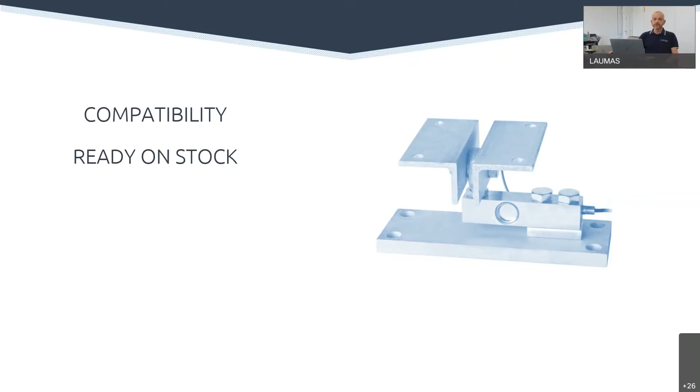The second strength that we have to keep in consideration is the stock. We have about 50 standard load cell models in our catalogs, and all of them, except the very special ones, are available in stock. Just to give you an idea, we have about 40,000 load cells in stock ready for delivery. And in general, our average lead times are 2-3 days from the ordering date.

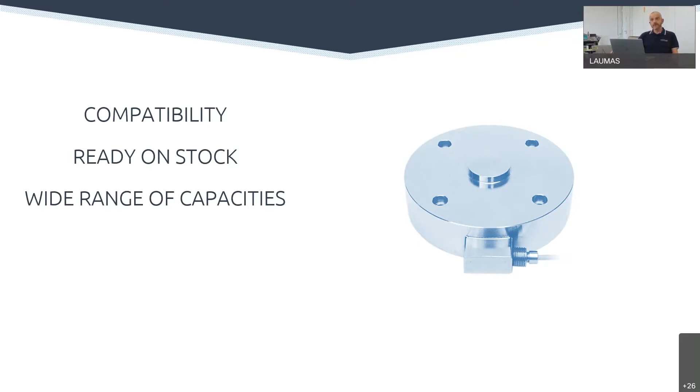Supporting the stock, we have a wide range of capacities. With our standard load cells, we cover a range of capacities going from a few grams up to 750 tons. And for every single model, we have several capacities available in order to offer you a suitable solution for any application in force and weight measurement.

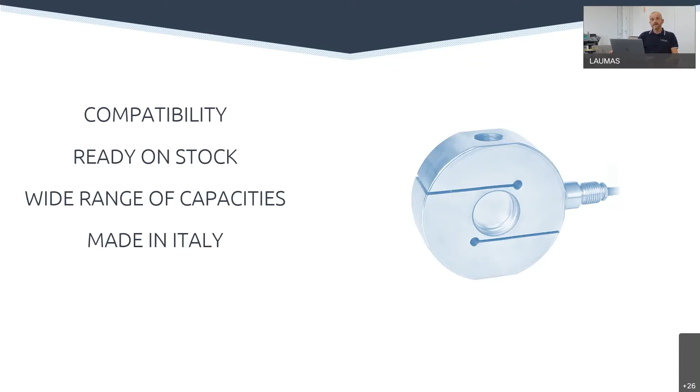The fourth strength is that we have many load cells made in Italy. Like any other producer worldwide, we make cost-effective load cells, for example single points and shear beams, in China for a matter of production costs. But 40% of our load cells, and especially the high-quality ones, are still made in Italy, and we are really proud of it.

The last strength that we keep in mind is that we make customized load cells. As I told you, we have our own factory in Italy, and so we can produce customized load cells made according to the customer's requirements. We can make them with any shape, any capacity, up to 2,000 tons. We can make them for high and low temperatures, with double bridges, with integrated analog output, and so on. This is a niche market, but it's certainly an added value and one of our strengths, because not many producers worldwide are interested in making customized load cells.

So, how to choose the right load cell according to your application? When we approach a new application, we base our choice on two main factors, which are the environment and the type of weighing. Knowing the environment is absolutely necessary for us to start understanding which kind of load cell could be suitable. If, for example, we are talking about the food or chemical industry, we will certainly need stainless steel load cells, and we will exclude alloy steel.

At the same time, if we have to make a scale for a warehouse, stainless steel will probably not be mandatory, and we could think about alloy steel load cells with galvanized mounting kits to reduce the costs. If it is, for example, an installation in the flour industry or in oil and gas, we will probably need load cells certified for explosion-proof areas, and so on. So, one of the first things that we have to keep in consideration and that we need to know is the environment.

Once that we know the environment, we need to know the type of weighing system that we have to realize. Is it a truck scale? Is it a conveyor belt? A dosing system? Do we have to weigh, I don't know, a big silo or a small hopper? Is it a mixer with vibrations or a static weighing, as for example a platform scale?

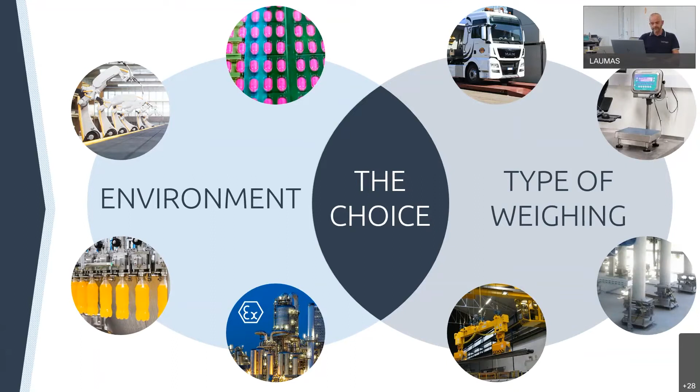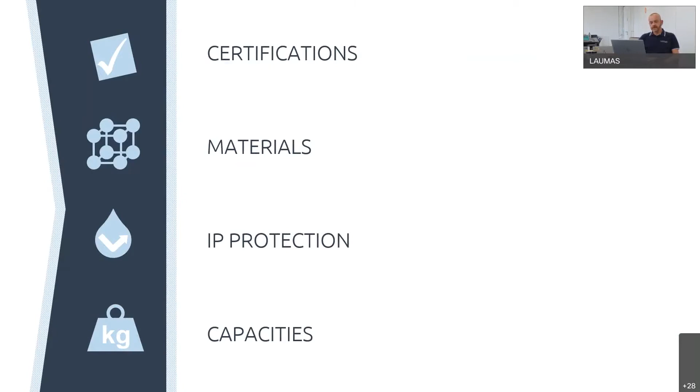Doing the operation of filtering that I described to you before, there are many things that we have to keep in consideration, and we can certainly start from the certifications. So, the system that you have to realize has to be legal for trade or not? I say that because very often people ask for load cells OIML R60 approved in class C3, C4, C5, and so on. But the question is, do you really need to realize a weighing system legal for trade or not? Or is it just for internal use?

When we talk about truck scales or retail scales, for example, the main part of them has to be legal for trade. So the load cells have to be OIML approved. And the higher the accuracy class, the higher will be the resolution of the scale that you'll be able to obtain. On the contrary, when we talk about the industrial sector, almost 90% of the weighing systems are for internal use. So the OIML approval for these systems is almost, I would say, useless.

Very often, people contact us to realize industrial scales or industrial weighing systems, asking for load cells approved C4, C5, and so on, because they want to be more accurate. But this is not necessary, and it's mainly a waste of time and money, because when you realize a weighing system for internal use, there are no restrictions about the number of divisions and about the maximum capacity of the scale.

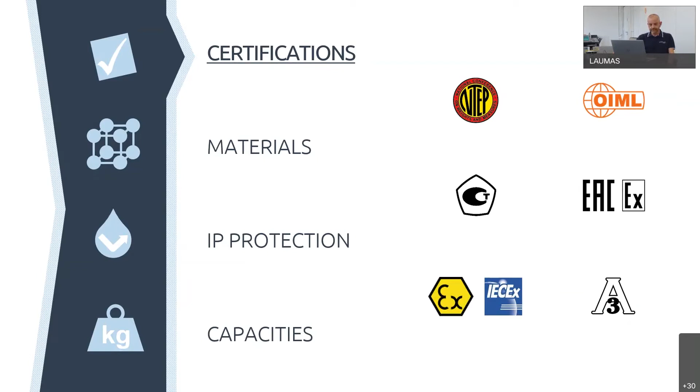As we have seen before, depending on the environment and on the weighing system that we have to realize, we have to think about the constructive material of the load cells. We have load cells made in aluminum, we have them in stainless steel 17-4 PH for very aggressive environments. We have them in stainless steel AISI 420 when stainless steel is required but the environment is not that bad. And we also have alloy steel load cells for common use.

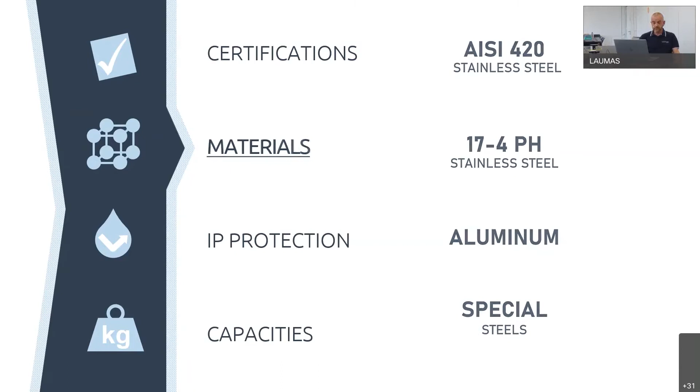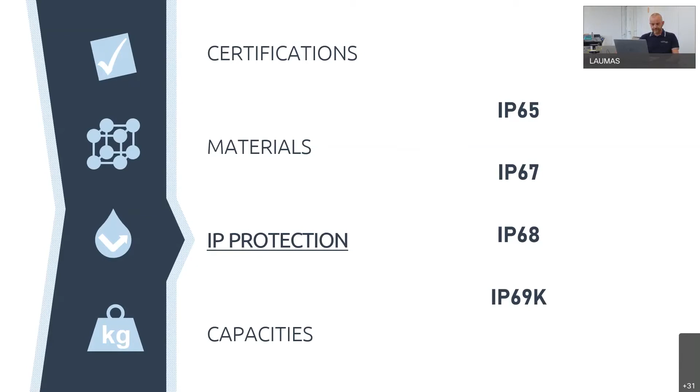Still connected to the environment, we have to keep in consideration the IP protection class. So we have load cells with IP class going from IP65 up to IP68 and IP69K. I always use the example of the pharma and food industry, and these are environments where you need to clean the scales almost daily with water with pressure and similar. So for such applications, you will probably need load cells with IP68 or IP69 certification.

Last but not least, we have to talk about the capacities. That is another important factor to identify the right load cells for your applications. So we produce load cells from 250 grams up to 2,000 tons. And it means that we have a solution for any kind of scale, from the smallest to the biggest ones.

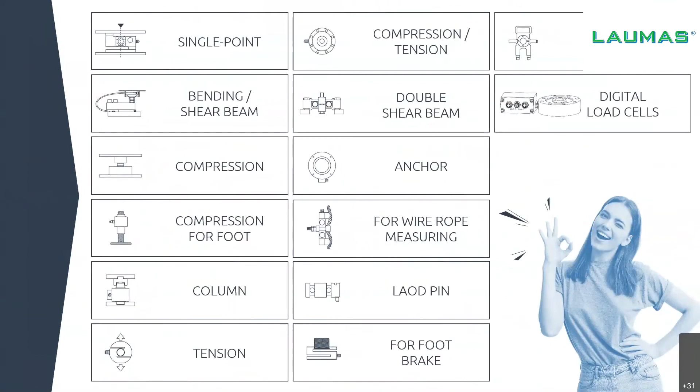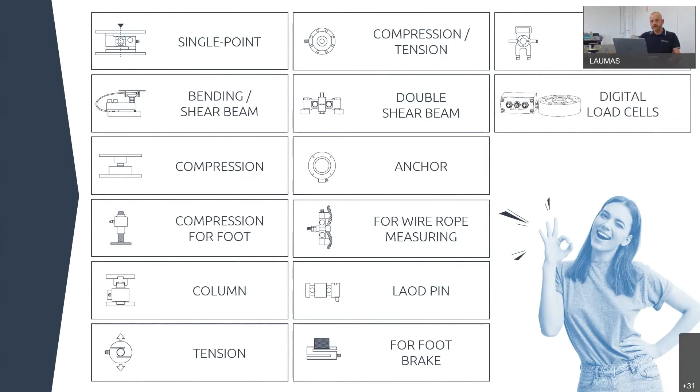And now we can start checking our load cell range divided per family. As we can see in this slide, we realize almost any kind of load cell. So we have single points, shear beams, bending beams, tension and compression, load pins, and so on. So the variety is really huge.

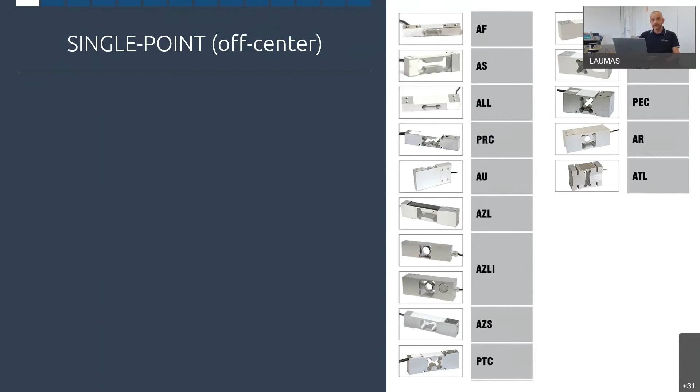Usually single points are low capacity load cells, and the smallest in our range is 250 grams, while the biggest one is for 2 tons. In general, the higher the capacity, the bigger the load cell, and the off-center too. There is always a proportion between the maximum capacity and the off-center load. So, in general, if a load cell has a small capacity, it has a small off-center too, and vice versa.

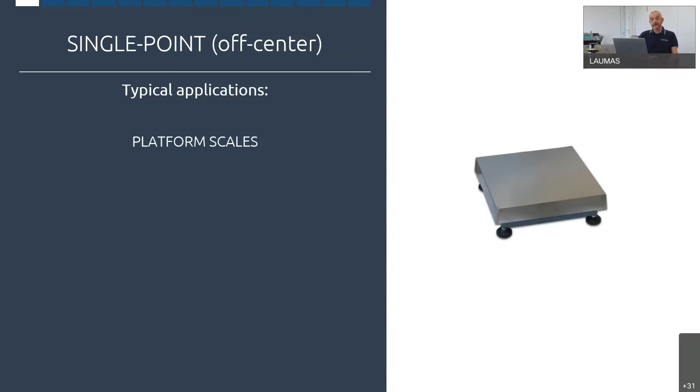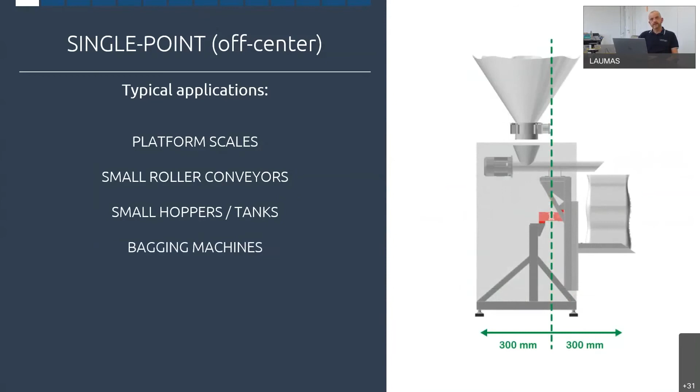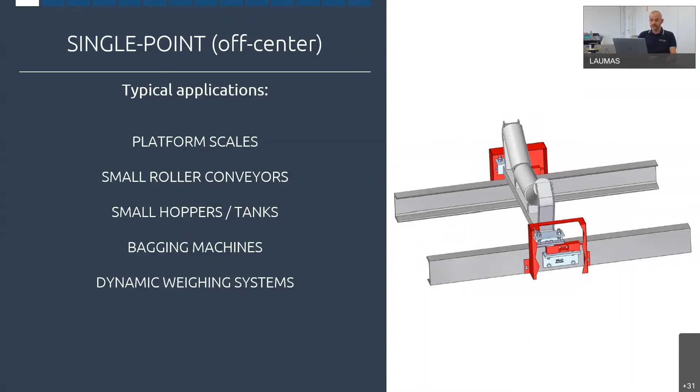Now we can start checking some typical applications realized with single points. The most common ones are certainly platform scales and retail scales. But you can also use them to weigh small roller conveyors, small hoppers and tanks, and filling and packing machines. Other applications where we generally install single-point load cells, but in pairs, are weighing bridges for conveyors for dynamic weighing applications, and machines for web tensioning. There are many more applications for the single points and for all the load cells that we will see later, but we just selected the most typical ones that we realize almost daily.

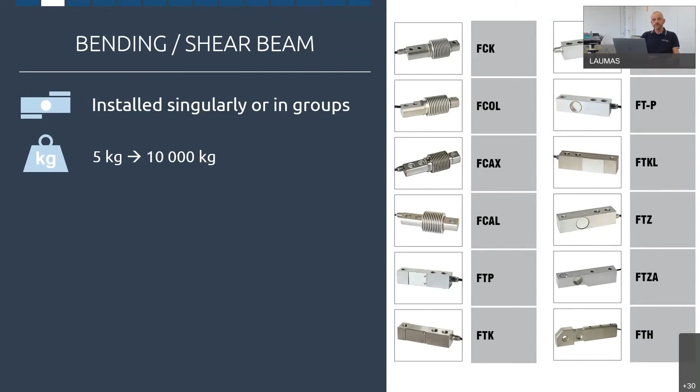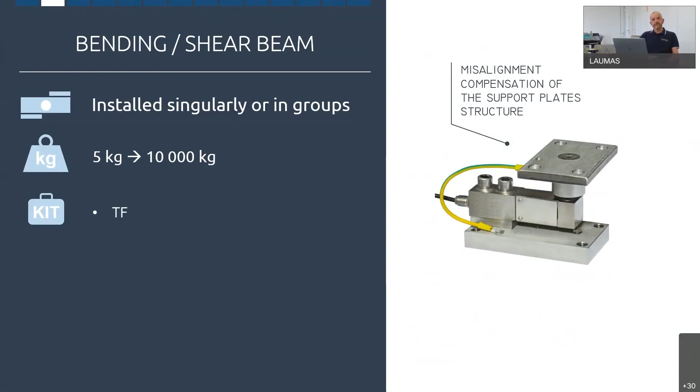To be installed with our load cells, we have 3 main families of mounting kits: the family TF, PV, and PS. Each of these mounts is available completely in stainless steel or in galvanized steel, and has specific features to comply with specific applications. So, for example, the TF series is suitable to weigh static hoppers. The PV is perfect to weigh conveyors, while the PS series is the better one when you need to weigh, for example, mixers with high vibrations.

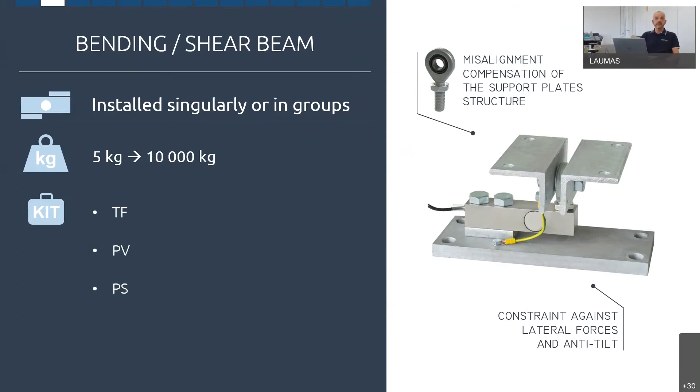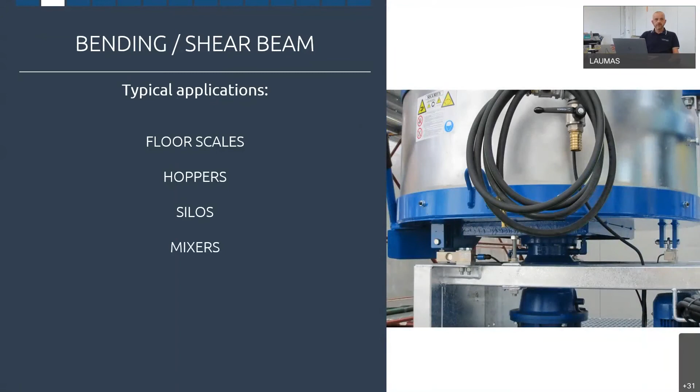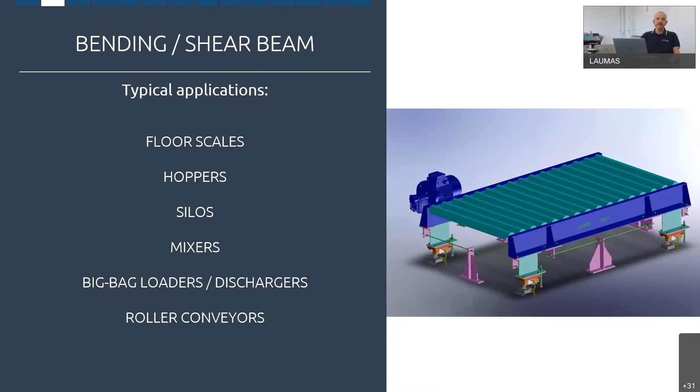And now we can check some typical applications realized with bending and shear beam load cells. So we have, for example, floor scales, hoppers, silos of medium-small capacity. We can also use them to weigh mixers or big bag fillers or dischargers, and also roller conveyors. Again, these are just examples of applications. There are many others, but I would say that these are the most popular ones.

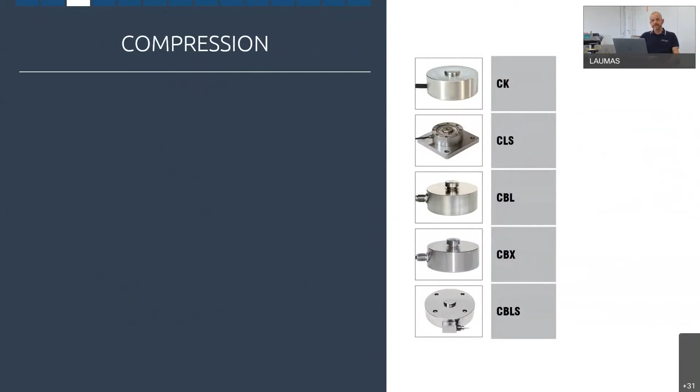Now we can switch to another important family that is composed of the low-profile compression load cells. As with the beams that we have seen, the compression load cells are generally used in groups of 3 or 4, or even more connected in parallel, but you can also use them singularly. So these are just indications. The range of capacities goes from 200 kilograms up to 750 tons. But from time to time, we also realize bigger ones, up to 2,000 tons.

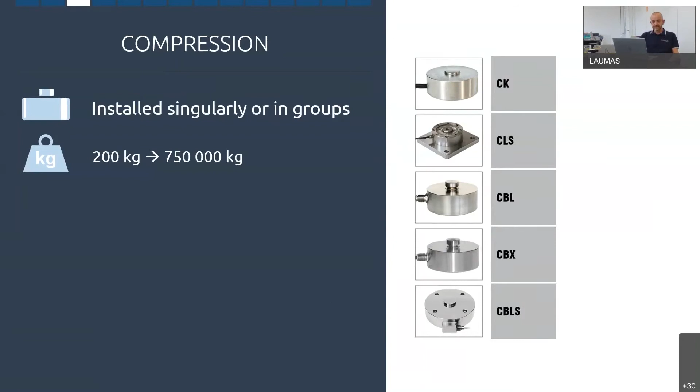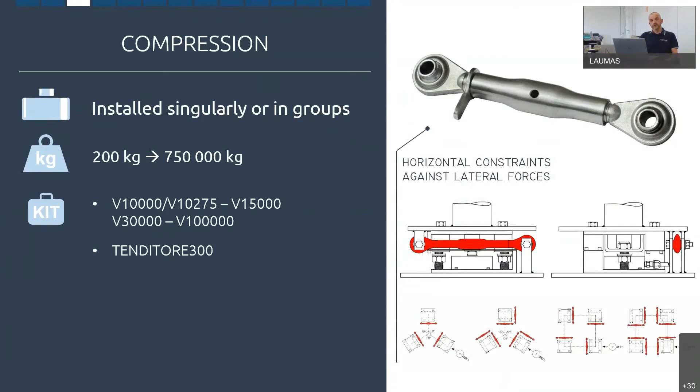These load cells, depending on the models, can be coupled with several mounting kits. So, for example, for the CBL series, which is our most popular, we can offer the V-series mounting kit. It's a complete mounting kit, user-friendly and including an anti-tilt system and constraints against lateral forces. This family of mounting kits is suitable to weigh structures from a few hundred kilograms up to hundreds of tons, and is generally used to weigh silos and tanks. As an alternative to the complete mounting kit, we can also offer stay rods and bases to help you in building mounting kits on your own according to your specific needs.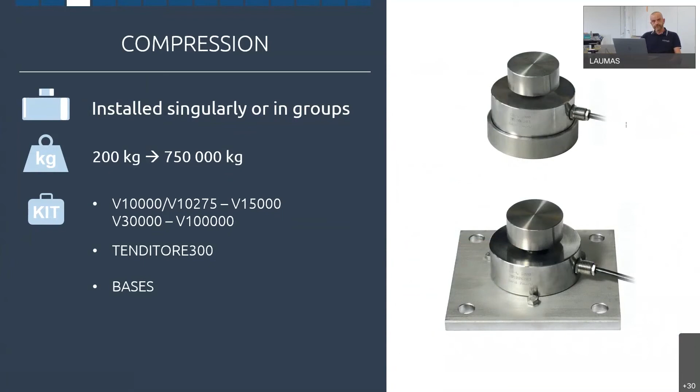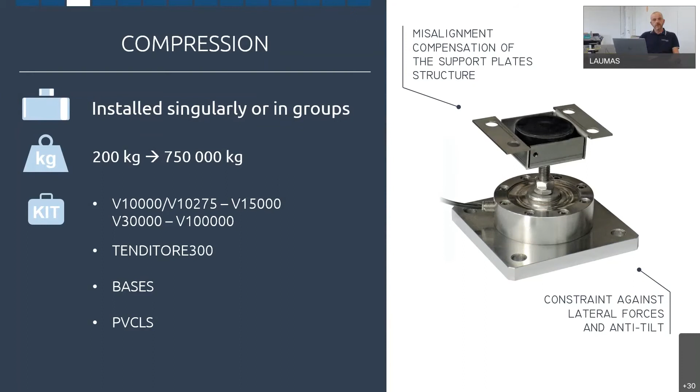We also have some specific models of mounting kits especially made for CLS load cells and realized with the same concept that we used to realize the mounting kit series PV and PS that we have seen for the shear beam load cells. So we have the PV CLS and the PS CLS. Same concept, same reasoning for the selection.

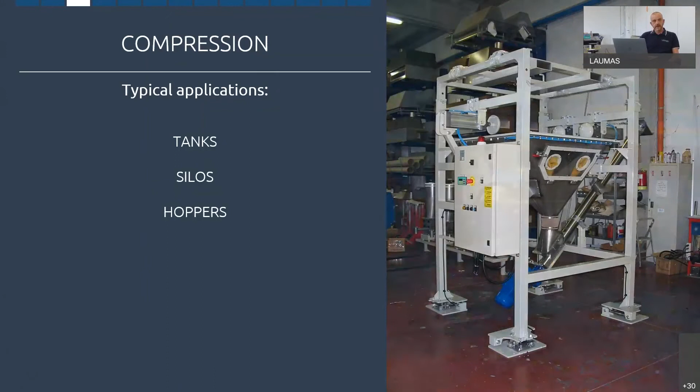And here again, we are back to the typical applications. As I told you, certainly tanks and silos, especially of medium-high capacity, are the most popular applications for which we suggest installing this kind of load cell. But you can also use them to weigh hoppers, mixers, and again, big bag loaders.

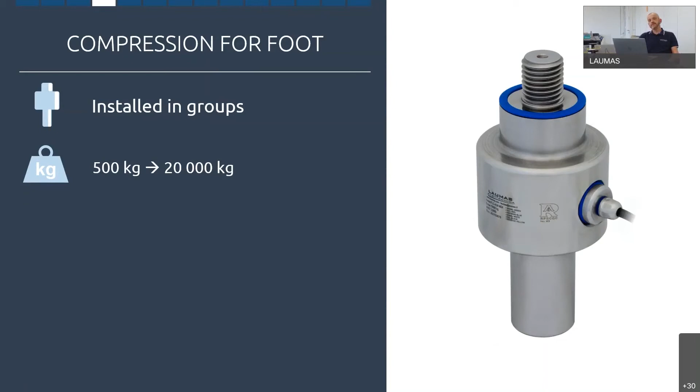And now it's time to talk about a brand new load cell in our range. It's the model FLC that we have designed and developed during the last years and that we are going to put on the market in the next few months. It's a compression load cell to be installed directly on the foot. It is born to be used in groups and covers capacities from 500 kilograms up to 20 tons. Its peculiarity is that it has been designed to fulfill hygiene norms about sanitation and respects the 3A regulations that I described in the beginning when I was speaking about the certifications.

The mounting kit that we recommend for this kind of load cell is a special foot that is compliant with the same norms about sanitation. But it can also be installed with any other kind of foot, rigid or self-centering.

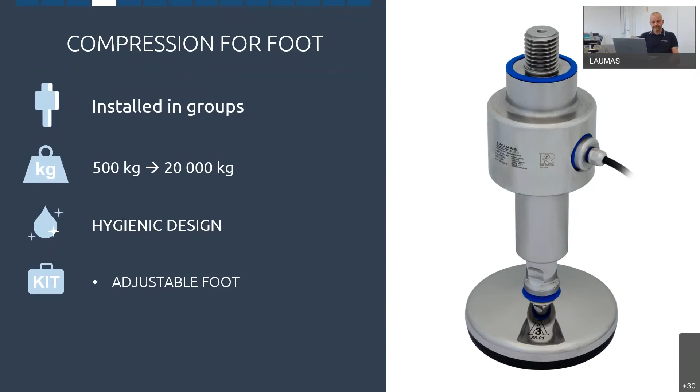The typical sectors of application for these load cells are obviously pharma and food industry, where sanitation is a must for the customer. So you could think to use it to weigh, for example, milk containers, refrigerated storage tanks, hoppers and reactors, all installed in food and pharma.

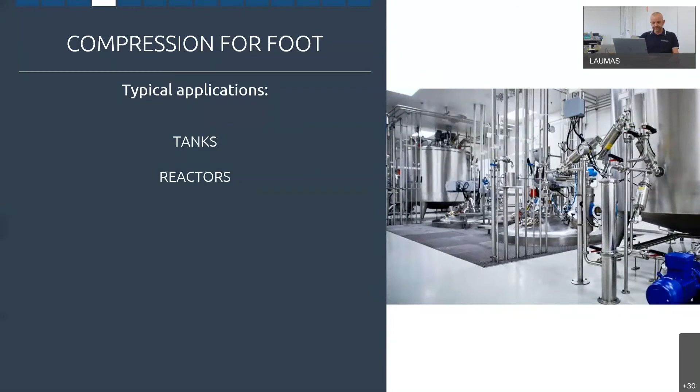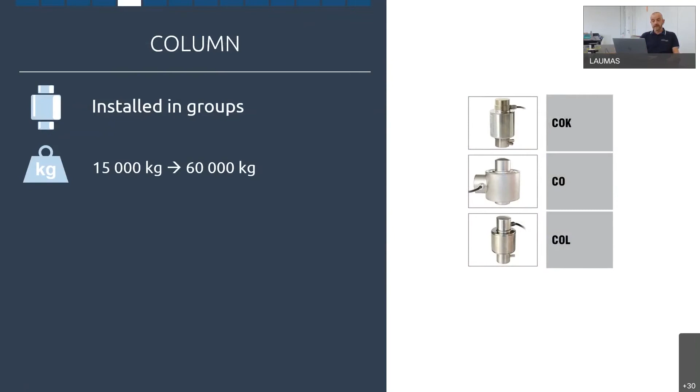Always in the field of compression load cells, we can now check at column compression load cells. These load cells are generally used in groups, mainly from 4 up to 10, 12 pieces also, and connected in parallel. The capacities are quite high, and as you can see, the range starts from 15 tons up to 60 tons. The mounts that we can offer are bases that are generally used to install these load cells in truck scales, because this is the main application for these models.

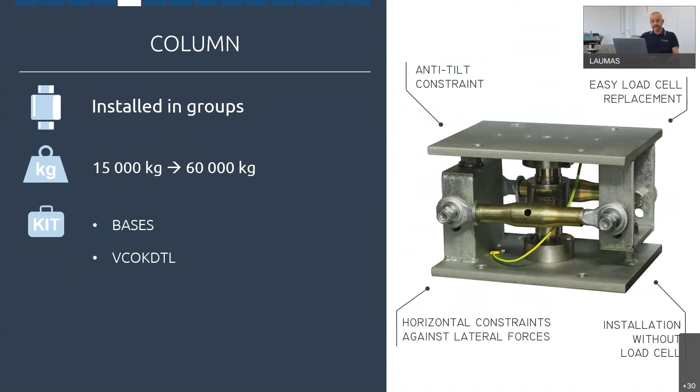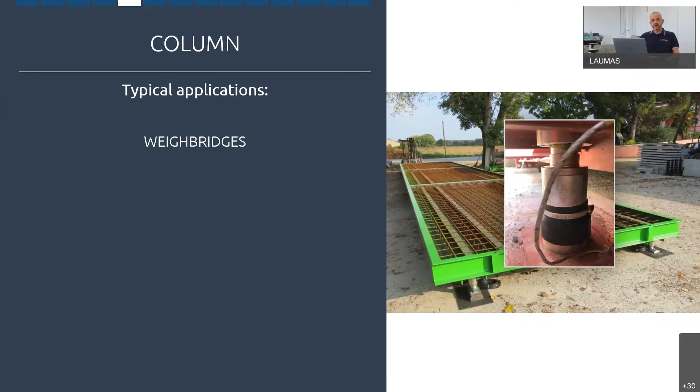And we also have a special mount called VCOKDTL that is realized to weigh big silos. As I said to you, the typical applications are mainly two for these load cells. So we have the weighbridges, that are the main part of the installations involving such load cells, but we can also use this model in conjunction with the mounting kit model VCOKDTL to weigh big silos and tanks.

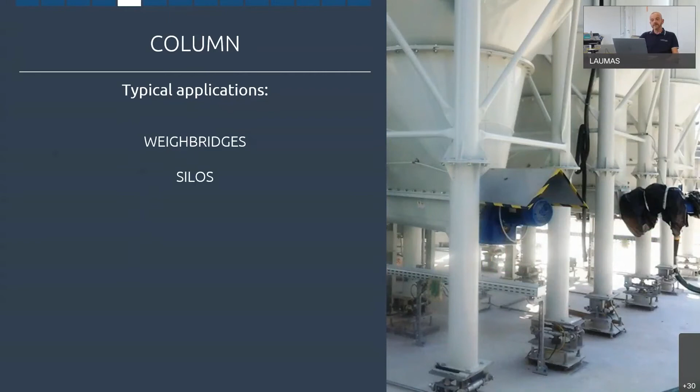We have seen compression load cells with any shape and dimension, and now we can check at the tension load cells. Again, as we can see in the slide, we have several models to cover the biggest possible range of applications. As most of the other load cells, these load cells can be used singularly or in groups connected in parallel, depending on what you have to do, obviously. And again, the range that we can offer is quite wide. It goes from 15 kilograms up to 250 tons.

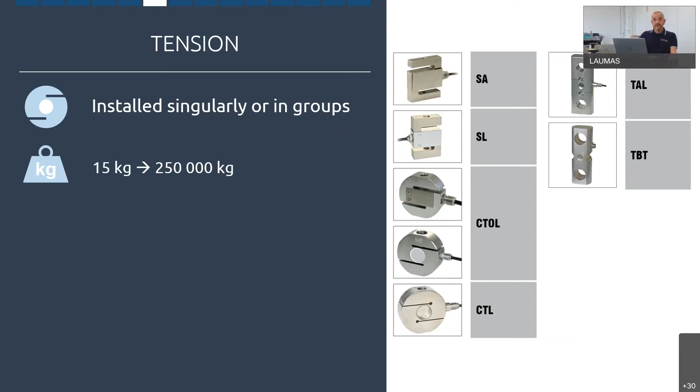As mount for these load cells, we just propose spherical joints, because usually the installer takes care of the mount on his own. So it is not necessary that we provide a complete mounting kit or set for the installation.

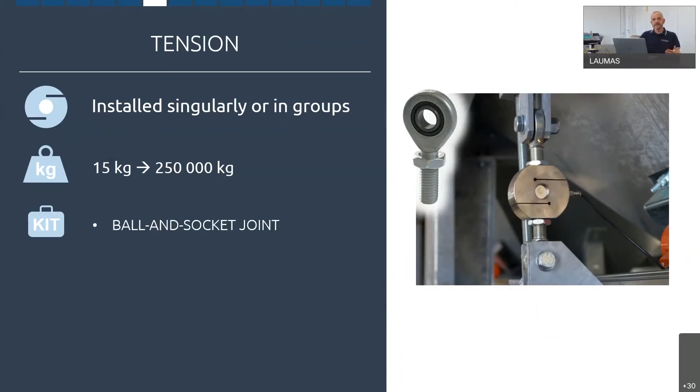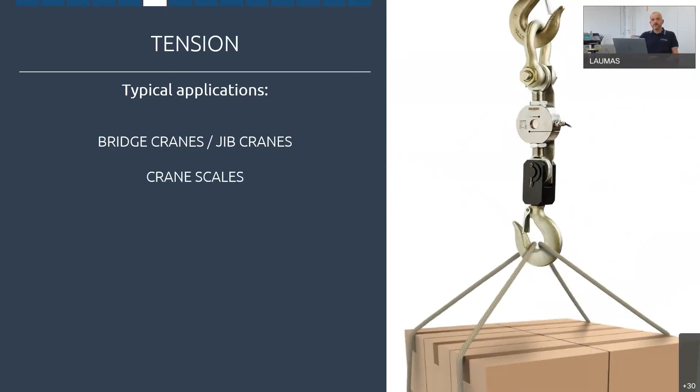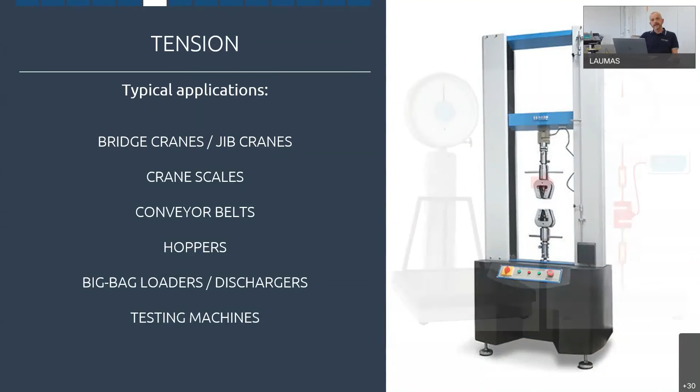There are many applications involving tension load cells, as for example cranes and lifting equipment in general, but you can also use it to realize crane scales. You can use it to weigh big conveyor belts, especially in the concrete sector. You can use it to weigh hoppers, again, big bag loaders and dischargers. You can install it in testing machines, and you can also use it to revamp old mechanical scales, transforming the scales from analog to digital.

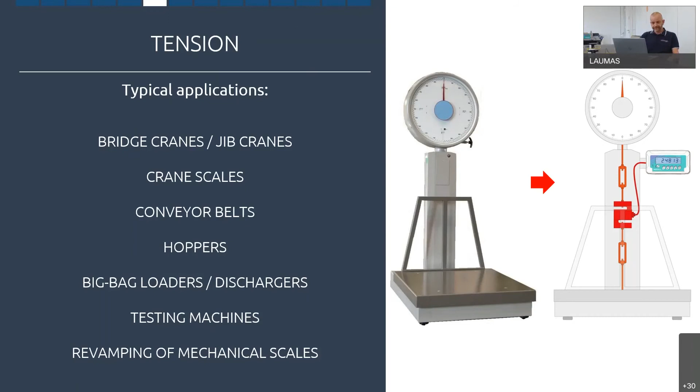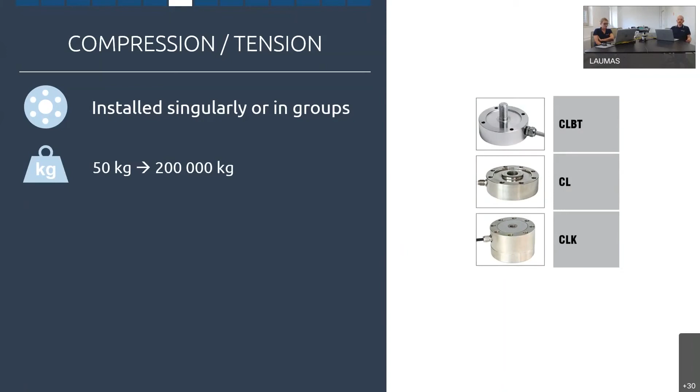Similar to tension load cells, we also have tension and compression load cells. So these load cells can be used in groups, of course, but very often are used singularly. The peculiarity of this model is that you can use it in both directions to measure the forces, both in compression and in tension. Again, the range is very big, from 50 kilograms up to 200 tons. And we do not offer mounting kits for these load cells, because usually the customer installs it directly into his machine and takes care of that. Typical applications, as I was telling you, are testing machines, testing equipment, and presses in general.

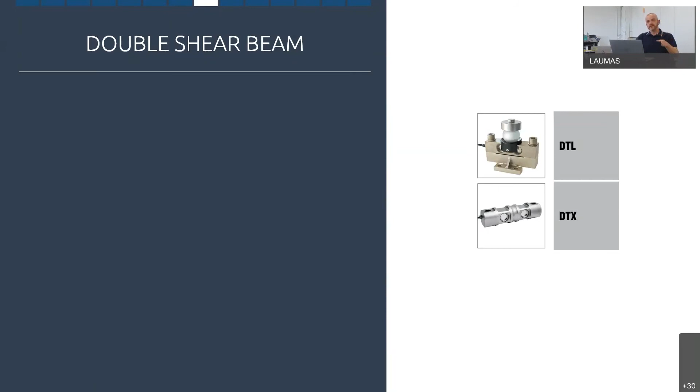Then we have double shear beams. These models are similar to the single-ended shear beams that we have seen before, but the method of installation is different. With the single-ended beams, the load cell is fixed on one side and the force is applied on the other side. While for double shear beams, the load cell is fixed on the two sides and the force is applied in the middle, in the center of the body. The range of capacities is quite high and goes from 9 tons up to 27 tons.

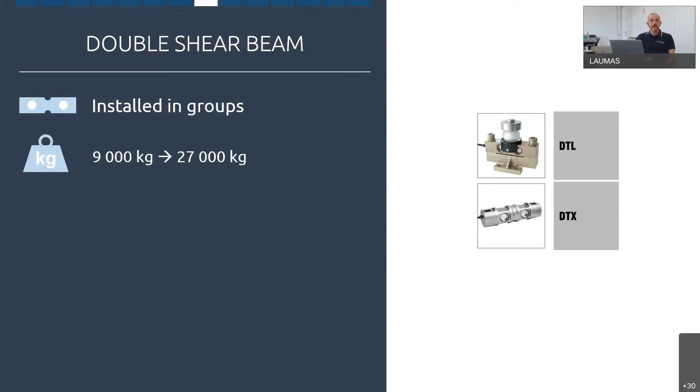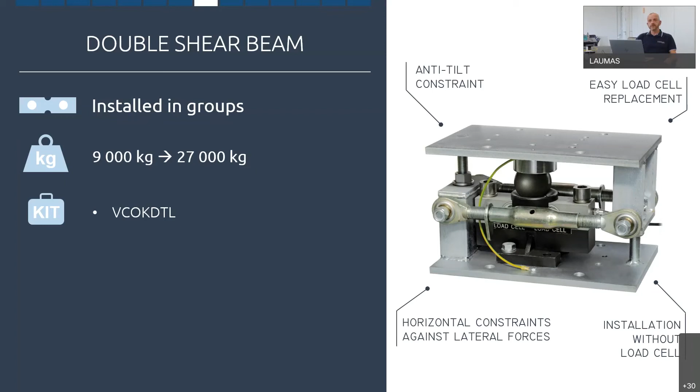We have two different types of mounting kits. The VCOKDTL, that is the same as the VCOK that we have seen before, and that we use to weigh tanks. It's identical to the model that we have seen for the column load cells. And then we have the model VDTX, that is especially made for the DTX load cell. And the peculiarity of this model is that it can be used both in tension or in compression. Typical installations for these load cells are mainly weighbridges, same as the column load cells. And especially the model DTX is very used for onboard weighing applications.

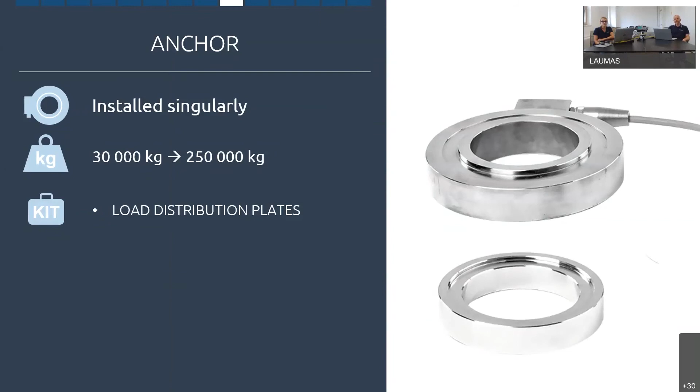In our standard range, we also have anchor load cells. Now we are checking at a niche sector, let's say, but still important. This model is always used singularly and has just high capacities, from 30 tons up to 250 tons. As an option for this load cell, we can offer the base for the load distribution. And where do we install these load cells? These load cells are generally used in monitoring applications of containment structures, to control continuously the force applied on tunnels, on dams, on bridges. So it is mainly a safety device to control how the concrete reacts against the forces coming from the outside.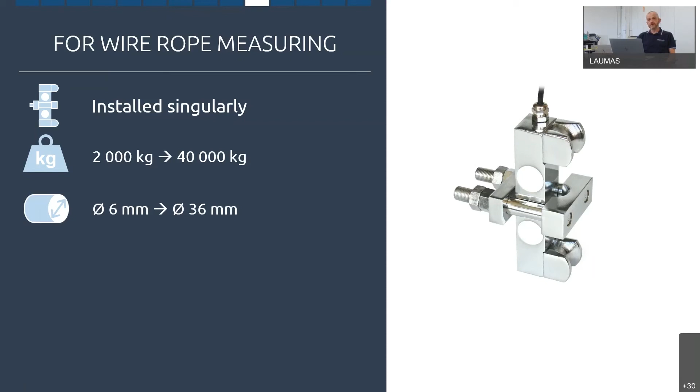Now, we can check our load cell for wire rope measurement, and it's the model FUM. This load cell is always used singularly. The capacities that we can cover go from 2 tons up to 40 tons, and it is compatible with wire ropes with diameters from 6 millimeters up to 36 millimeters.

It is generally used to revamp old cranes and lifting equipment where safety limiting systems are missing, because it is very easy to be installed, as it can be clamped directly on the wire rope, and the structure doesn't need mechanical modifications.

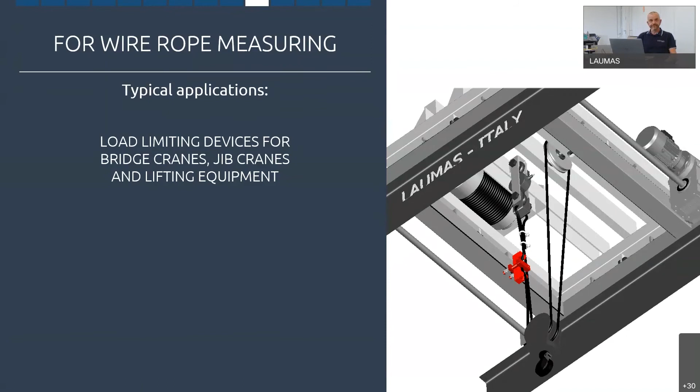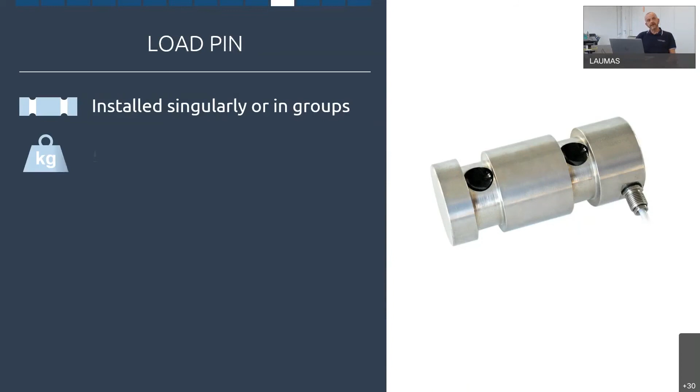And here we are with our standard load pin, model LAU. Load pins can be installed singularly, but also in groups, again depending on what you have to do. Our standard model has a capacity from 5 tons up to 20 tons. And the typical applications are again in lifting equipment. So load pins are mainly used as limiting devices in cranes and lifting equipment. The installer removes a mechanical pin of a pulley, installing a load pin to measure the force.

Frankly speaking, the LAU model, which is our standard one that we always have in stock, could be suitable when the crane builder is flexible and can adapt the system to it. But in 90% of the cases, the load pins that we realize are customized and have specific mechanical dimensions and are designed according to the customer's requirements in order to replace the existing mechanical pins.

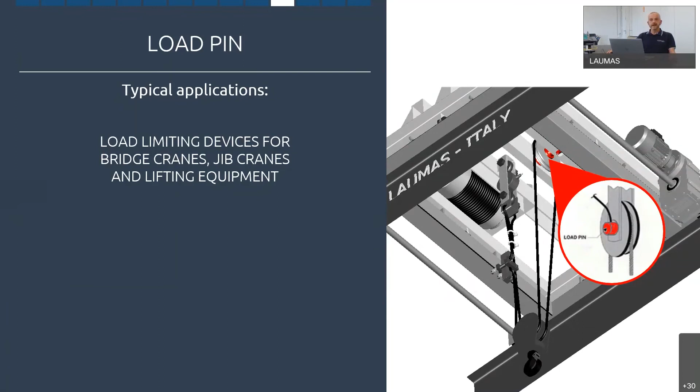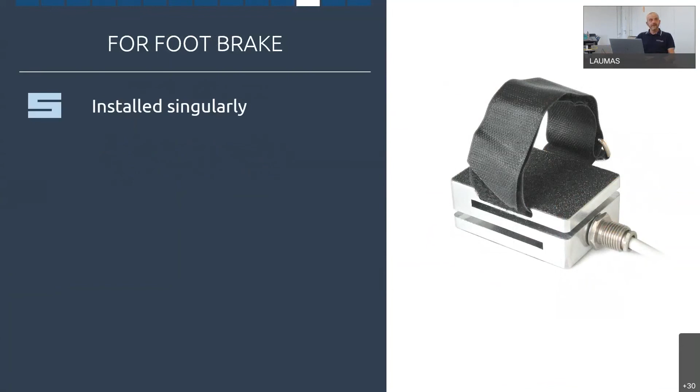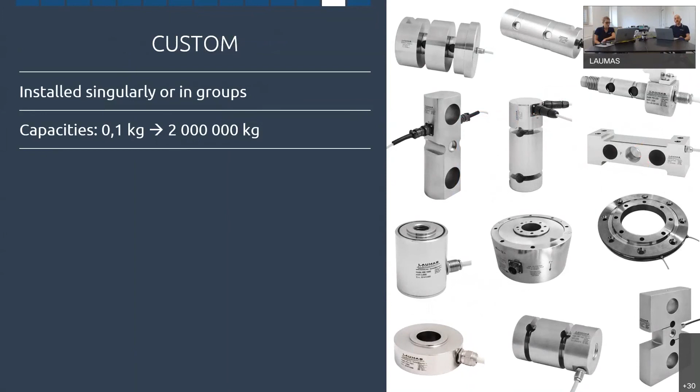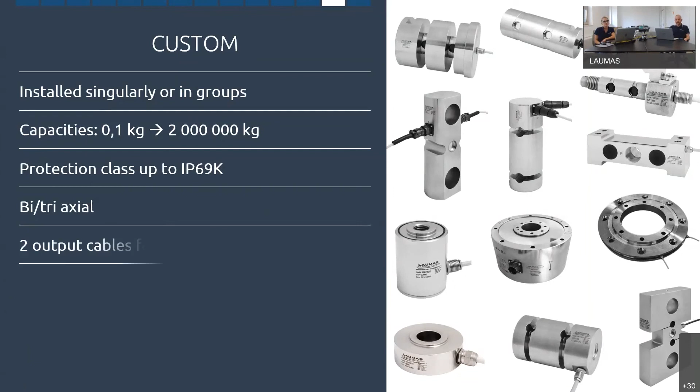At the end of this panoramic, we can take a look at our customized load cells. As I said many times during this presentation, we are used to producing tailor-made load cells according to our customer specifications. It's a niche market, but it's an added value, because not many producers do it. We can realize almost any kind of load cell for any environment. So we can make tension links, load pins, load cells for submersion applications, special double shear beams, and so on.

We can make it from a few grams up to 2,000 tons, as I told you. We can make it biaxial or triaxial to measure both the force and the moment. We can make it for high and low temperatures with integrated analog output. And we can also realize it with ATEX or IECEx approval. So, in case you need something special or unique, even for just one piece, for example, remember that you can rely on us for such projects.

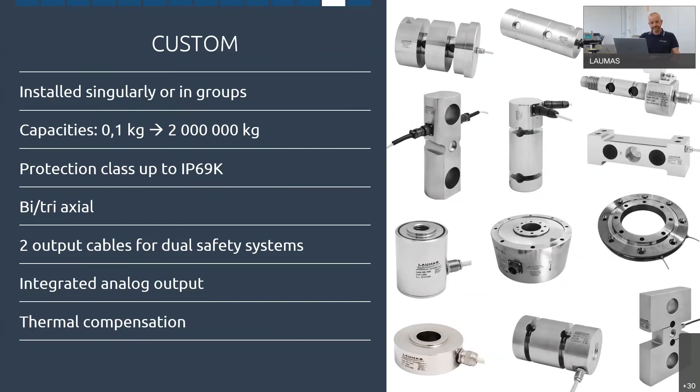To complete the presentation about tailor-made load cells, we can take a look at a special application that we have realized. So, as I told you, we develop many special load cells for special installations and curious applications. But unfortunately, very often we must sign NDAs with our customers to protect their projects. So we can't show all that we have done, and I guarantee you that we made many. So here we have an example for which we don't have to protect anybody. We have no secrets about it.

And here we can see a rugby scrum machine that is generally used by rugby players during their daily trainings. So we have equipped every pad of the machine with tailor-made biaxial load cells to measure the force generated by every player during the scrum training. Doing it, we can monitor how much and in which direction they push the pads. And with the data that we are achieving, we can help them in improving the training and the performances. For this application, we have also realized a nice app using our electronics to monitor and register the data of every single player and to check the progress with the passing of time.

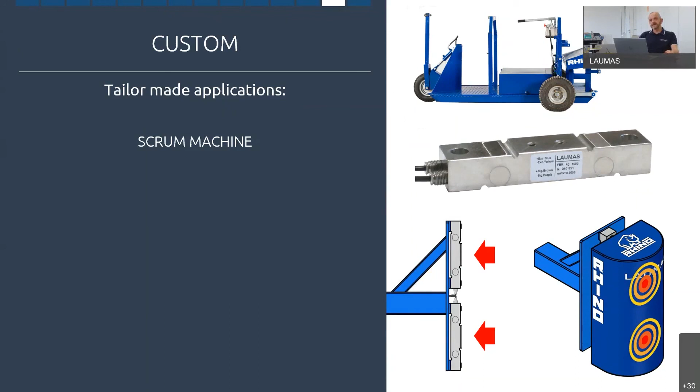All the load cells that we have seen during this presentation are analog load cells. But even the digital ones are getting more and more popular on the market. And we are also developing a model for truck scales that we expect to put on the market in 2022, so next year. But our solution when our customer asks for digital load cells is the digitizer LCB.

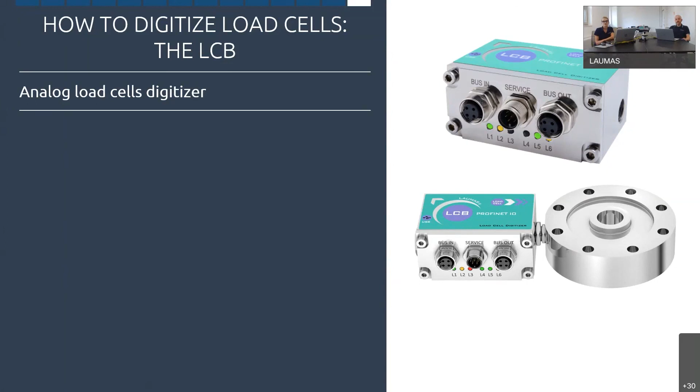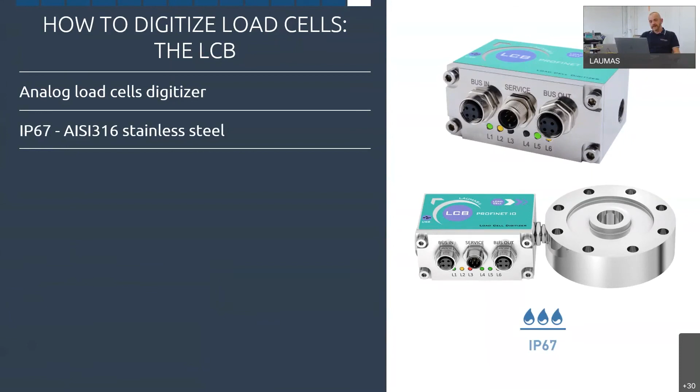The watchword for this product is versatility, because it is compatible with any analog load cell made by any producer worldwide. It can be screwed directly on the load cell's body or even installed very close to it. It is very compact, fully stainless steel made, and with an IP67 protection class.

But the greatest advantage of the LCB compared with real digital load cells is that it can be equipped with almost any fieldbus for the connection to almost any kind of PLC available on the market. So, using this kind of product, any load cell becomes digital. And we can say it's really a universal device, so keep it in mind in case of needs.

Okay, that's it. There should be probably much more to say about our load cells, about applications and so on, but I couldn't kidnap you more than this. So I would say that my presentation is completed, and now it's time for your questions. So I give the stage to Gabriela. Gabriela, did we get any questions during the presentation?

Is the LCB only for single load cell applications? Well, it is mainly used for single load cell applications. You can also connect the load cells in parallel first and then connect them to the LCB, but we recommend using it when you have just one load cell, because in the other cases you can use common weight transmitters, for example.